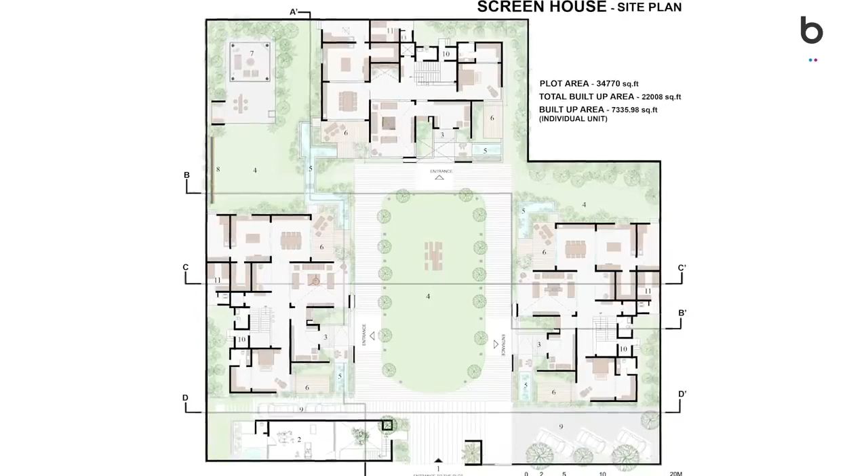Plot is located near the Science City. It is a densely populated area in Ahmedabad, and the plot area is around 35,000 square feet. It is rectangular in shape. This is the north, so we were proposing 3 units in this plot. We tried different placements in the same plot.

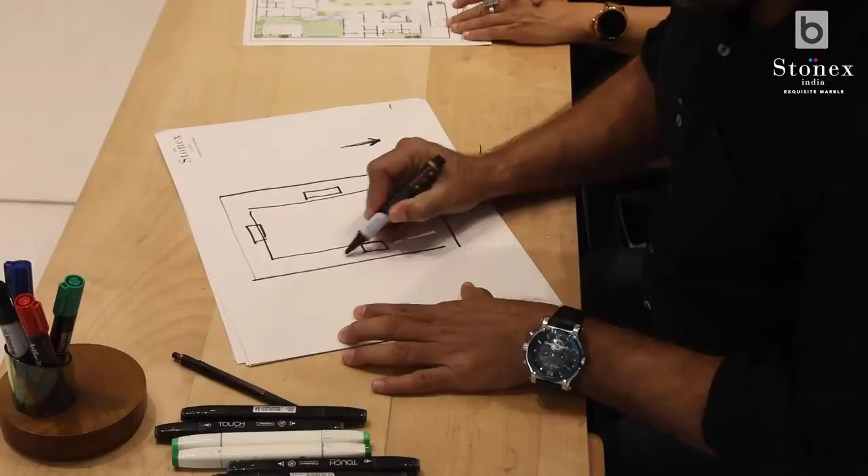Eventually we ended up with a simple solution. We just drew a line like this, and we placed 3 units on it like this. By placing the units like this, one unit is facing west, another unit is facing east, and at the same time the center unit is facing north. By placing the line which we drew here, that has become a passage, a connecting passage later on when we design the internal spaces of each house.

This is the entrance foyer, which is double heighted. Through this entrance foyer, you enter into the vestibule. A nice eastern and western light is coming into the vestibule. From this vestibule, you go inside and come into the passage.

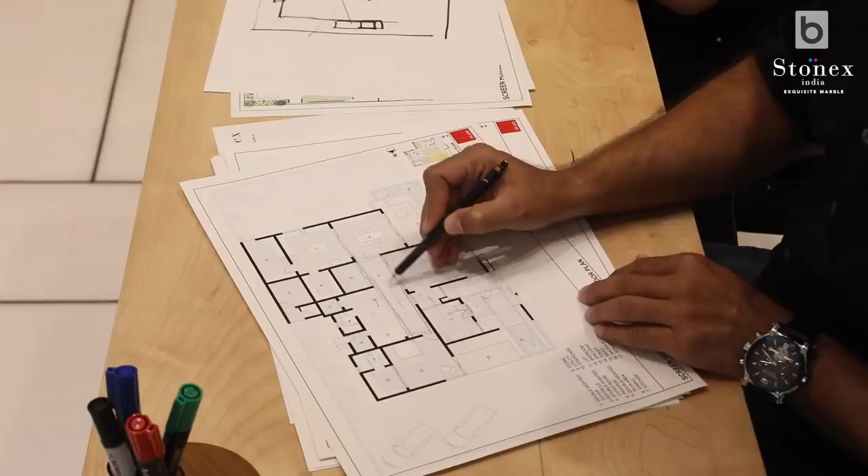This passage will take you to the kitchen dining. At the same time, on the left side of it, we have a double heighted puja room, taking light from the sky which is flushing the backside of the wall, which we have kept in exposed brickwork so that we can reduce the intensity of light as well as heat. That connects the bedroom also at the ground floor.

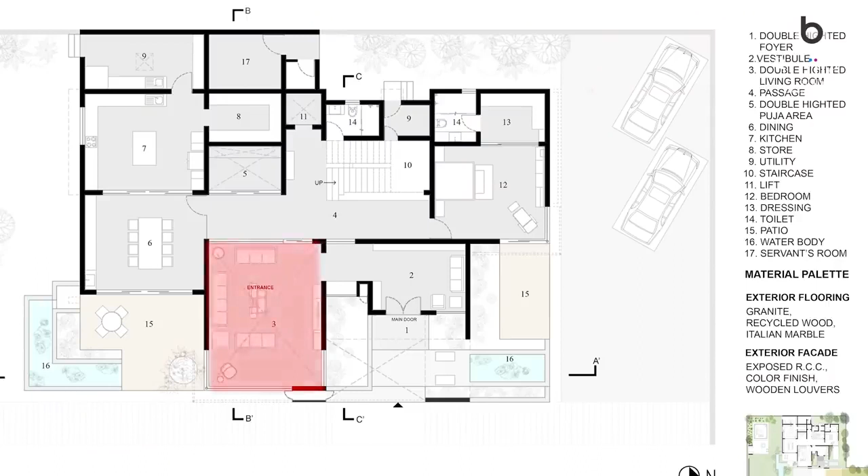Opposite to the puja room, we have a double heighted living room which is connected to the central courtyard, and by giving the double heighted glazing, we can even see the sky, which was very important for us to have a connection with landscape as well as sky, and at the same time water also.

From this living room, when you go further inside, there is a kitchen, dining and extended patio which is again surrounded by water bodies and which is overlooking the central courtyard also.

The same passage which was on the ground floor, on the first floor, that passage is connected to all 3 bedrooms. Since this bedroom is a little bit at the back, we didn't have the vision to the courtyard, so what we did, we created a nice overlooking bridge.

So if this is the foyer, we made a bridge like this, and this is the main entry. So when you come on the bridge, one can see the entrance foyer, and at the same time they can see the central courtyard which we have proposed.

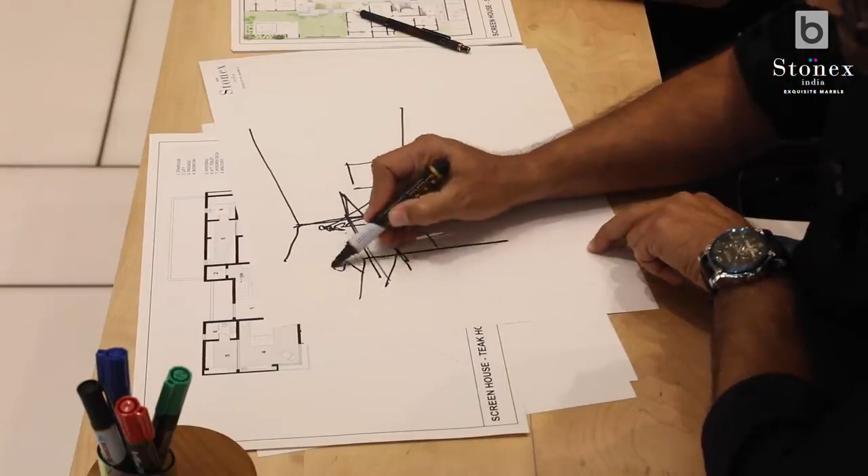So this is the master bedroom. In the master bedroom, we have kept the interior very simple. This is the exposed RCC wall. Actually, it is a structural member of the building, but we have used it as a backdrop of the bed.

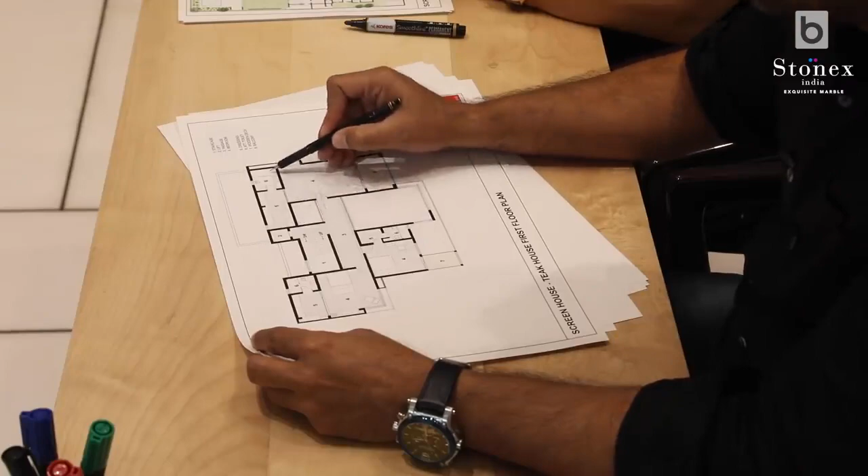Bedroom is connected to the walk-in closet with the attached toilet. In this corner, we have given a study table, and the bedroom is again connected to a balcony which is connected to the central courtyard. To protect the inside spaces from the harsh sunlight of Ahmedabad, we proposed a screen.

So that is how we ended up with the name Screen House. We worked on different types of screens, but eventually we concluded with this more simplistic solution by having vertical louvers. So to install the louvers, we proposed girder frames, and on those girder frames we introduced this screen which will filter the light as well as heat, while our connection to the sky from inside remains uninterrupted.

During the installation of the louvers, we saw a nice shadow falling on the surface of the wall, and that really inspired us. After seeing the shadow, we redesigned the door and extruded those impressions which were falling on the door, and we designed the door.

Material palette is very simple, very basic. We have used exposed concrete, along with wood and natural stones.

We wanted the landscape to flow with the architectural narrative. Over a period of time, the building grows older and nature takes over. The C-shaped passage on which the 3 units are placed is connected by planned landscape and water bodies.